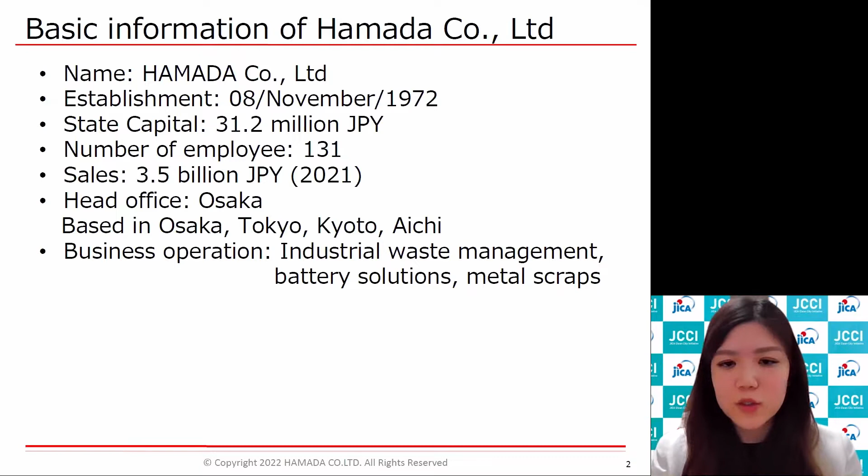I would also like to talk about our main lines of business. We have mainly three businesses: metal scraps, demolition service, and waste management and energy solutions. In industrial waste management, in addition to plastic and metal scraps, we handle photovoltaic cell and mercury-related industrial wastes, which are said to be difficult to treat. For energy solutions, we handle reuse of lead batteries.

So our main line of business, as I mentioned, is taking care of industrial waste. And so we also focus on reuse and recycling services of discarded photovoltaic panels. We're one of the first companies in Japan to be working on this business, and inside of Japan, photovoltaic panel treatment has become a big issue.

In Japan, solar panels became very popular from around 2010, and a lot of solar panels were installed. The life limit of these solar panels is said to be around 20 to 30 years, which means lots of panels will be discarded around 2030.

However, reality is that the discarded panels already exceed the estimate, and that is because there have been typhoons and earthquakes and other disasters that have led to replacement of solar panels. Already many panels have been discarded, and so treating these solar panels has become a big challenge for Japan. That is why Japan is working urgently to recycle these solar panels.

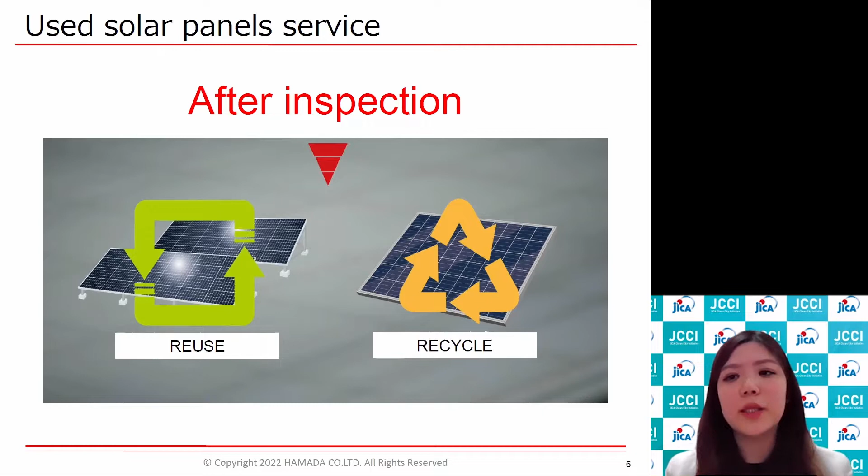First, we do an appearance check of the discarded solar panel, and we identify which panels can be reused and which ones cannot. For the panels that can be reused, we sell the panels to domestic and overseas clients. In the past, we have sold over 150,000 panels.

For the panels that are not fit for reuse, we will be recycling them so that they do not need to go to landfill. And this is our recycling scheme for the solar panels.

First, we dismantle the aluminum frame, and we use our equipment, called AFLD1, in order to dismantle the aluminum frame. We remove the frame without crushing the glass. If the glass gets crushed, it really becomes difficult to recycle the glass as raw material, and so dismantling the aluminum frame without destroying the glass is a key factor.

After the frame has been dismantled, the glass and cell sheet will come out and they are attached together. We use a hot knife technology, which heats to 300 degrees Celsius, to separate the glass and the cell sheet, and there will be no impurities on the glass or cell sheet after the separation.

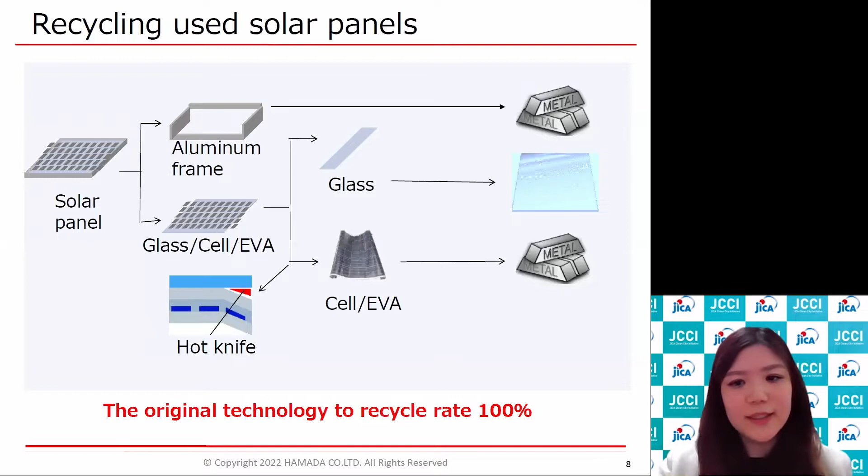Up until now, I have talked about Hamada's technology in Japan. Hamada also focuses on our overseas business. We have been selected to do a project survey for JICA. And even though it is not a solar panel project, we are currently doing a survey on the reuse and recycling of lead batteries in Côte d'Ivoire.

We are also certified by JICA as an SDGs partner, as a company working on SDG issues. Going forward, the reuse battery survey that we are doing for JICA and the solar panel work we are doing, we hope to combine these two in order to provide electricity to areas that currently do not have electricity. We strive to really contribute to a sustainable society that can help preserve people's health and their living environment in developing countries.

If you have any questions about the content I've presented today, please come to our booth or contact us to discuss more details. I look forward to talking with you. Thank you for your kind attention.

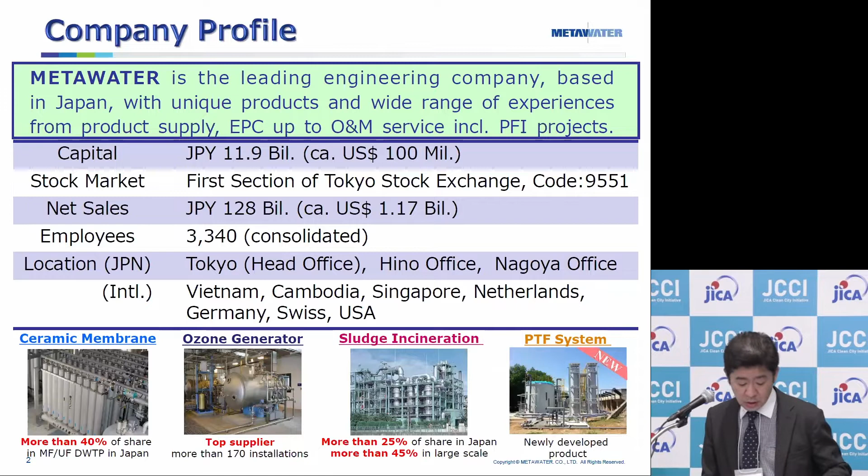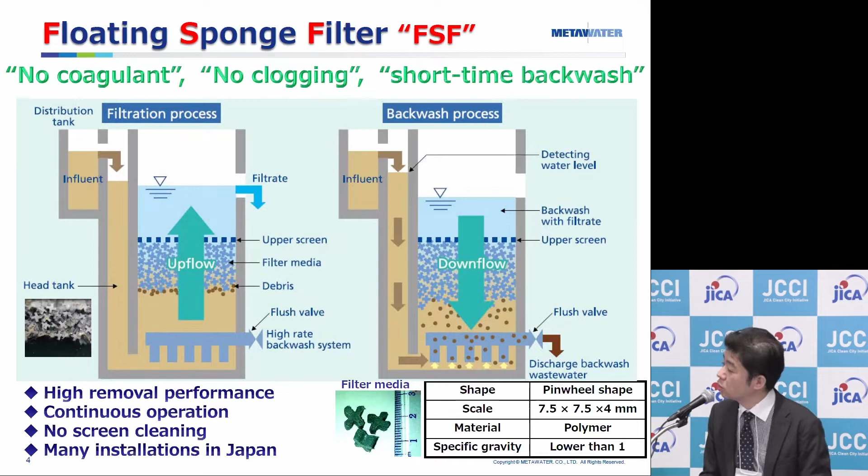Then at some point, in order to clean those substances which are caught, they are cleansed or washed out. That is the feature of this technology, or this process.

Next is the second process, in the middle, HTF. This process is an updated or renewed version of technologies existing in the United States or Europe. Conventional trickling filters have some problems, like clogging of water spray nozzles, odors from sludge, and having insects such as flies. Therefore, we have renewed this system, replacing those existing conventional systems, using some filter media to resolve this issue.

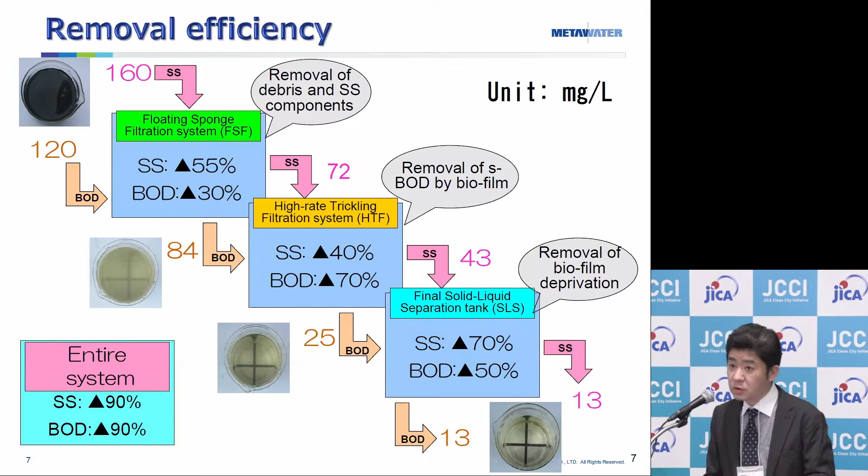So I have explained the benefits of PTF, and let us compare that system or technology with other existing treatment technologies or processes. What I would like to point out here is the power consumption. Power consumption is much lower with the PTF process.

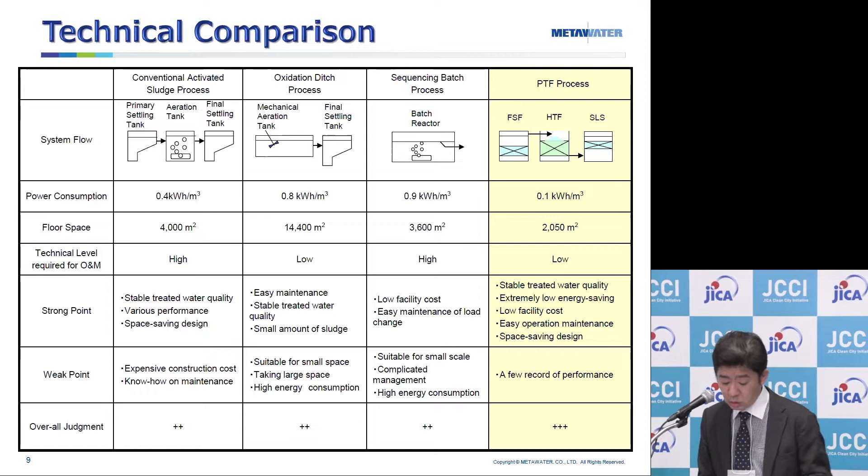And if you look at the floor space, the floor space for the PTF process is 2,050 square meters, which is smaller than the other process. So for those countries in which the available area or space is limited, this PTF process is attractive.

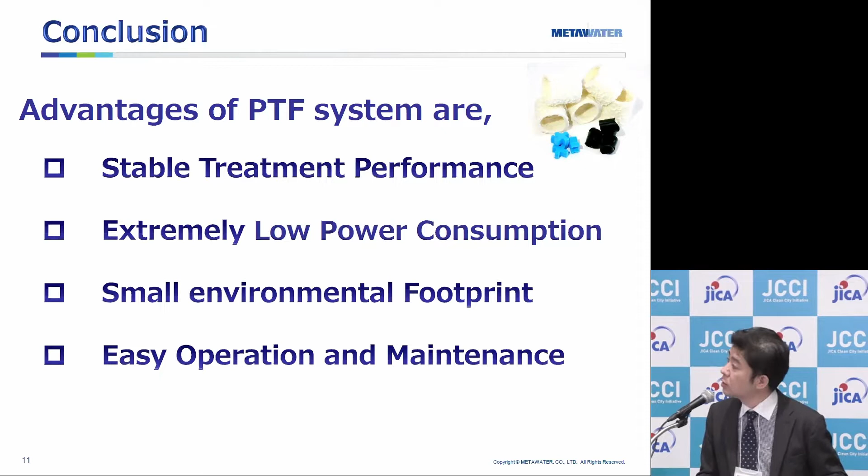And lastly, I have summarized the merits or benefits of the PTF. There are four: firstly, stable treatment performance; secondly, extremely low power consumption; thirdly, small environmental footprint; and fourthly, easy operation and maintenance. These four merits can be provided through our service.

And to conclude my presentation, I would like to thank you all for the invitation and giving the opportunity.

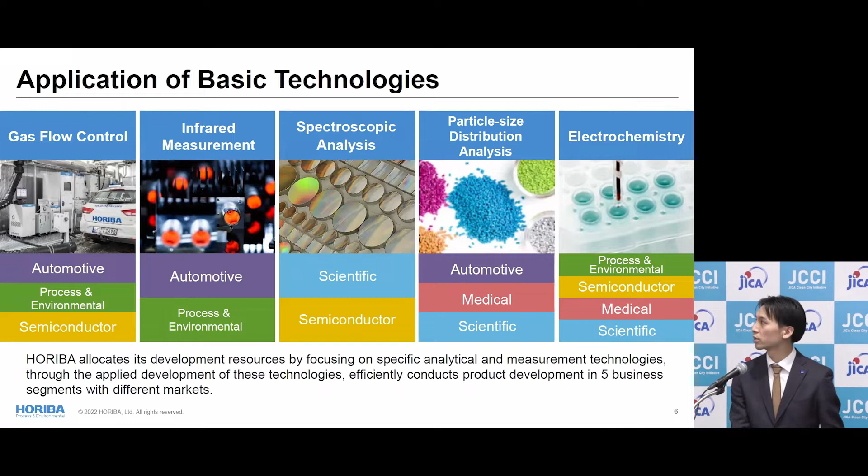In typical cases, on the right side you can see the yellow dots and also the blue dots. This shows the simplified monitoring systems, which are quite affordable and simple. By using these simple systems, you can increase the density or concentration of monitoring points. But what's important is to have AQMS, because the data from a simplified system has to be calibrated to ensure reliable data. So we add AQMS to those simplified systems to increase the reliability of the overall system.

Next, I would like to explain about the stack gas system in the power plant, and also steam boilers, glass furnace, and petroleum refinery, and also the waste incineration system. Our system is applied to make sure that no hazardous material or gas is emitted.

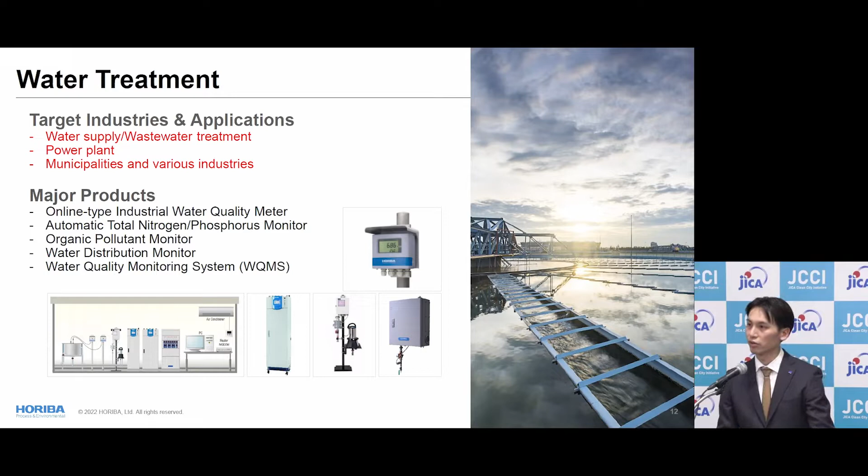This is about water treatment and monitoring of water quality. We have the monitoring system for water supply, water treatment, power plant, and municipalities. By integrating all the know-how of offline and online systems, we try to reduce the burden on the environment and respond to very high level and sophisticated needs. This is a water quality monitoring system, WQMS as we call it, and we have this applied across the world. In addition to the online monitoring system, we have offline instrumentation as well, so we can make a proposal of business on those products too.

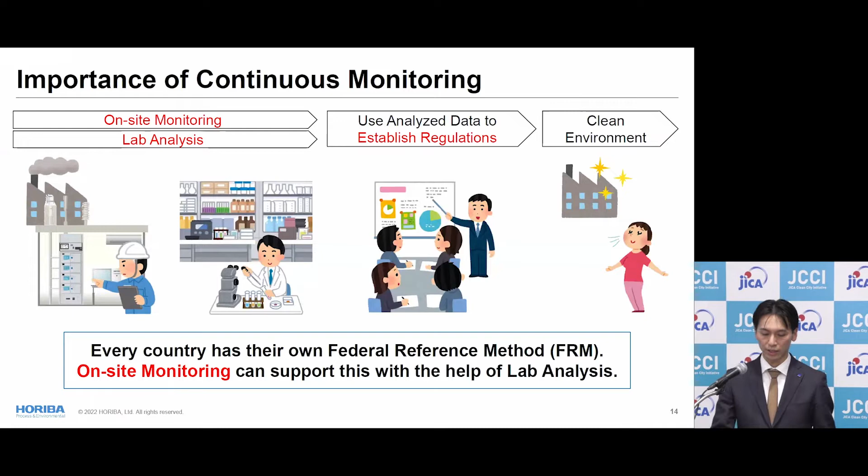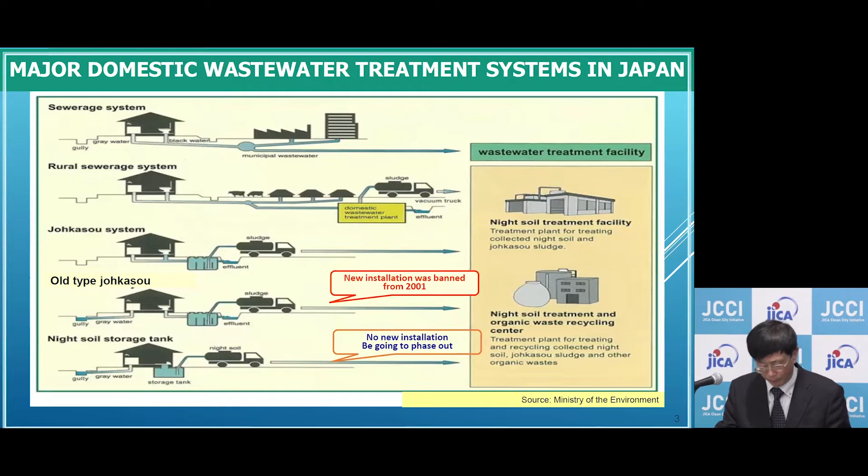johkasou is a facility to treat all wastewater generated from houses and is mainly installed and used in individual houses in Japan. In johkasou, the activities of microorganisms are utilized to decompose organic matter in wastewater. The treated water is disinfected with chlorine disinfectant and then discharged to rivers and other water bodies.

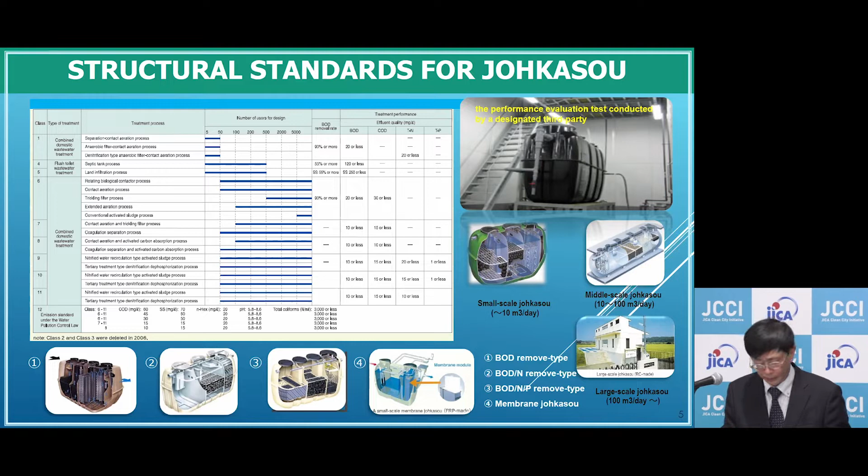In order to guarantee the treatment performance, johkasou must comply with the treatment method and structure specified by the government, or must pass the performance evaluation test conducted by a third-party organization designated by the government. johkasou can only be manufactured and go to market after being certified by the government. johkasou can be installed in individual houses and commercial facilities for wastewater treatment. It can be classified into BOD removal type, nitrogen phosphorus removal type, and BOD advanced treatment type based on their treatment performance.

In order to ensure johkasou have the good treatment performance as designed, johkasou should be properly installed, maintained, desludged, and inspected. With the johkasou Act enacted in 1983, a legal framework was established. Based on the law, technical standards for johkasou construction, operation and maintenance, desludging, and legal inspection, as well as a training system for johkasou technicians, were established.

During a normal maintenance inspection, works such as measurement of the effluent quality, replacement of disinfectant, checking of attached equipment such as a blower, and verification of sludge accumulation are performed. During desludging operation, the accumulated sludge in the tanks is dislodged and transported to a sludge treatment facility for further treatment. During the legal inspection, it is checked whether the installation, maintenance, and desludging have been properly performed and whether the treated effluent has reached the predetermined water quality.

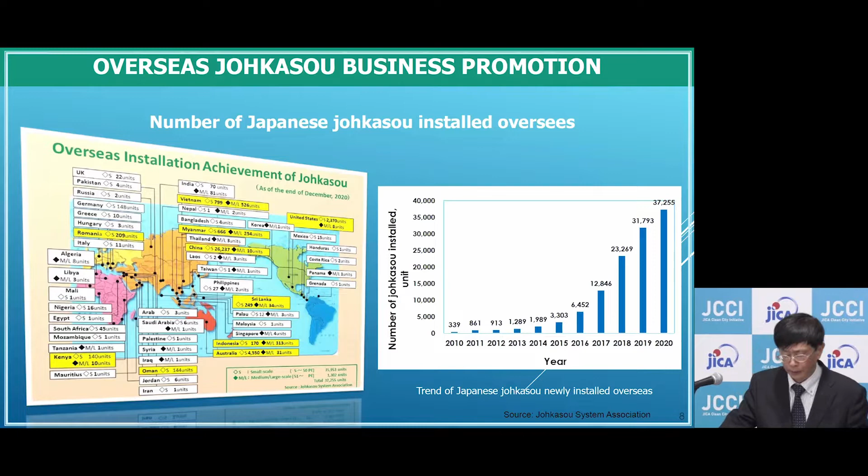The number of Japanese johkasou installed overseas is increasing year by year, and as of the end of 2020, about 37,000 johkasou have been installed in more than 49 countries around the world, and about 90% of them are installed in Asia.

With the increasing demand for johkasou in Asian countries, johkasou manufacturers are expanding their overseas business, and local production of johkasou is progressing. In particular, johkasou business is active in China, Southeast Asia, and South Asia.

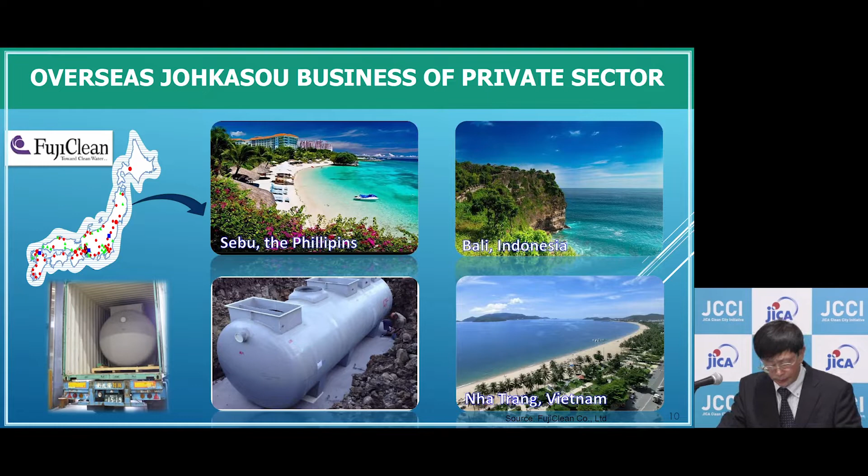Fuji Clean Industry, the biggest company in the johkasou industry in Japan, is developing johkasou business mainly in tourist resorts in Asia.

JECES is the first johkasou manufacturer to establish a johkasou production base overseas and is actively promoting johkasou business from Southeast Asia to South Asia and Africa.

Kubota, a famous johkasou manufacturer in Japan, develops johkasou business mainly in China, Vietnam, and Myanmar. Kubota have exported and sold more than 30,000 johkasou overseas.

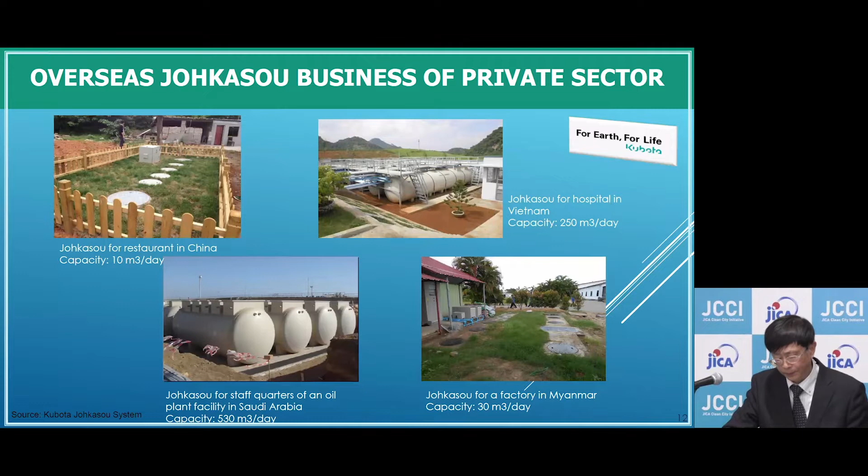Japan's johkasou system has become well-known in the world. We believe that johkasou will continue to contribute to solving sanitation and environment problems around the world, especially in developing countries. Thank you for your attention.

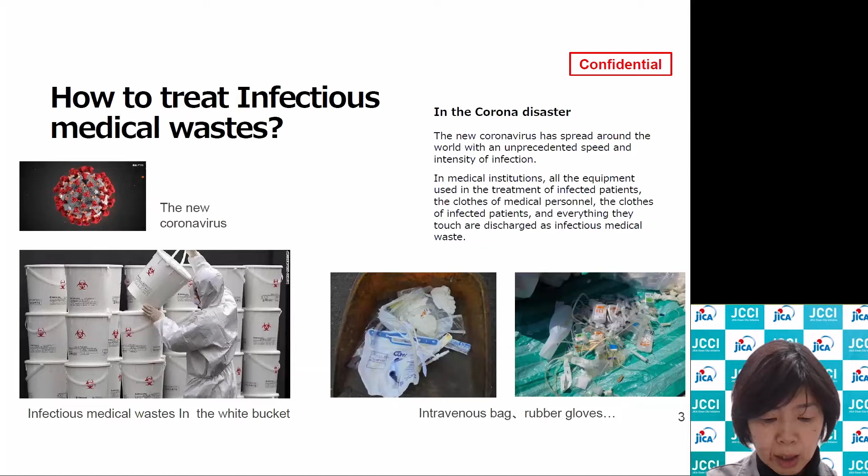So all of the equipment and the tools, medical tools used for treating this disease, are generated as infectious medical waste from the plastic containers, rubber gloves, or tubes. These are put in the white box in the picture and covered. Once it's covered, we are not able to open it again.

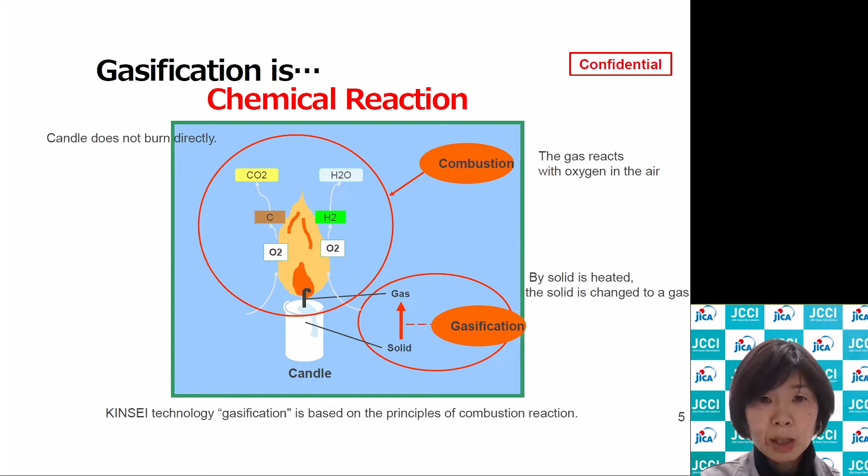And then carbon and hydrogen around the flame will combine in the ambient air, generating H2O or CO2. So this is about combustion. The case is that dry distillation technology follows this same philosophy or principle.

So once gasification has started and stabilized, a combustion agent is not needed. That is the feature of our technology, which allows for safe treatment, operations and maintenance, and cost effectiveness.

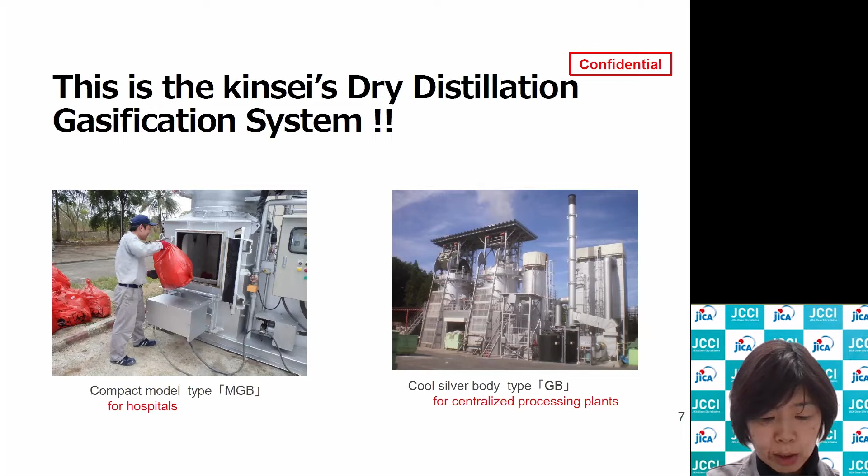In terms of all of this, ours is the best. This is Kinsei's dry distillation gasification system. From the left-hand side, one is a compact model, which was demonstrated in Phuket for JICA's project. The right-hand side, the larger one, is Type GB, our main product. This equipment is used by the waste management company.

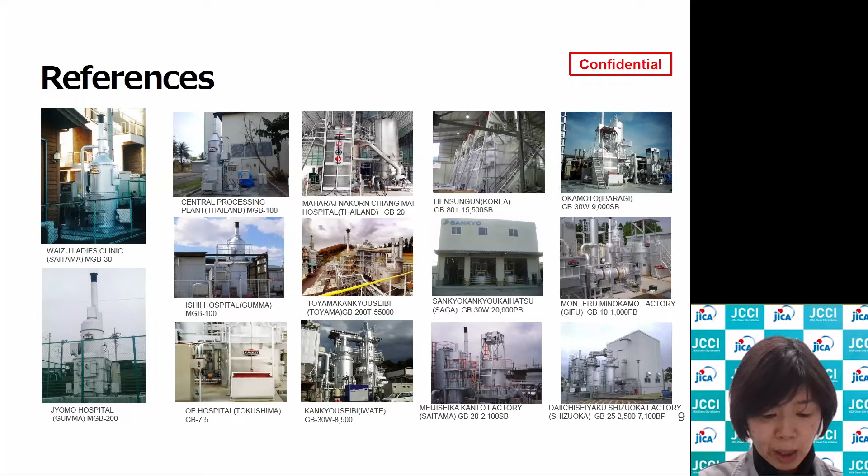Our equipment can achieve stable combustion, meaning thermal collection can be stably done.

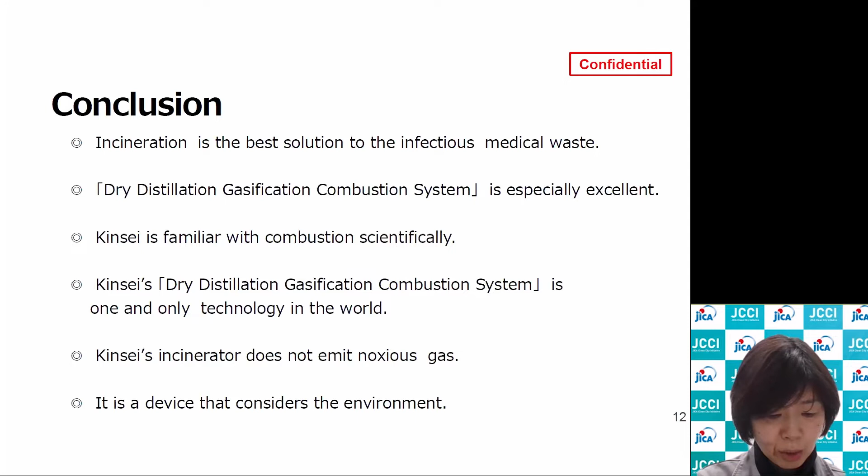So the conclusion: incineration is the best solution for infectious medical waste, and the dry distillation gasification combustion system is especially excellent. Kinsei knows combustion scientifically very well, and Kinsei's dry distillation gasification combustion system is one and only technology in the world. Kinsei's incinerator is contributing to environmental preservation.

Thank you for your attention. To meet your needs, we are able to provide our solutions. Your opinions, comments, and questions are always welcome. Thank you.

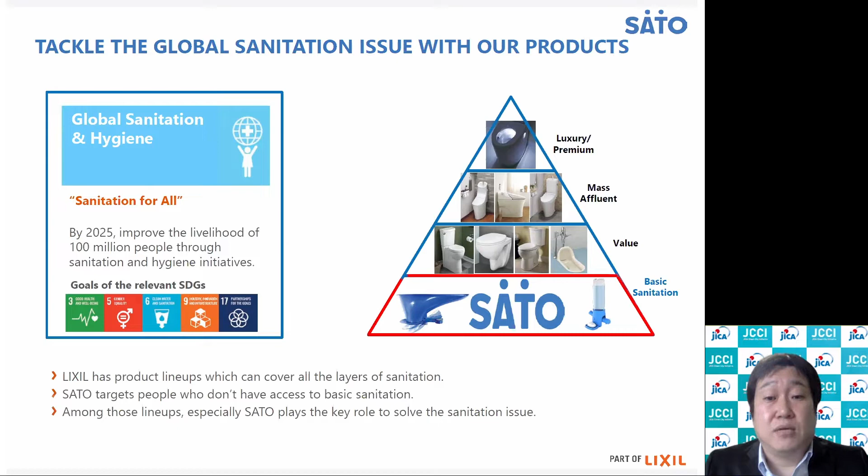You can see the pyramid here. At Lixil, we have several brands: the luxury premium segment at the top of the pyramid, down to mass production, or the area called value. So we have a wide range of products. And we are now proceeding toward what is called the bottom of the pyramid, to provide basic sanitation systems for people in need. Next, please.

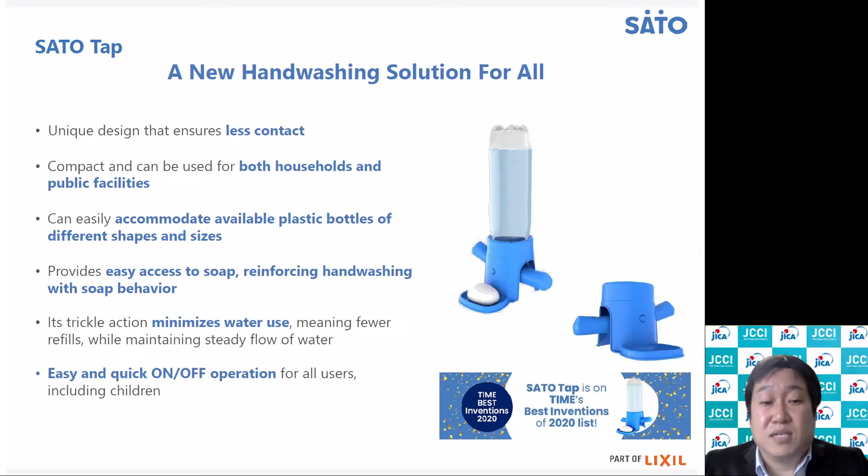Under COVID, it was difficult for any company to launch new products, but we developed this product. In 2020, Time magazine of the US gave us an award for the Sato tap as one of the most excellent products under COVID.

Because we are manufacturers, we have technology for manufacturing goods. The first thing we do is identify the needs and challenges of each country to determine what products should be delivered there. Along with the local people, we identify issues and try to solve problems together.

What's more important is local production and local consumption. Without that scheme, if we try to do the same as we do in Japan, it will not be possible to do the same locally. So we partner with local companies so that products can be produced locally and consumed locally, creating a cycle of make, sell, use locally - that's the key.

By running this cycle continuously and sustainably, the products can be produced and used. We are working to establish such a system.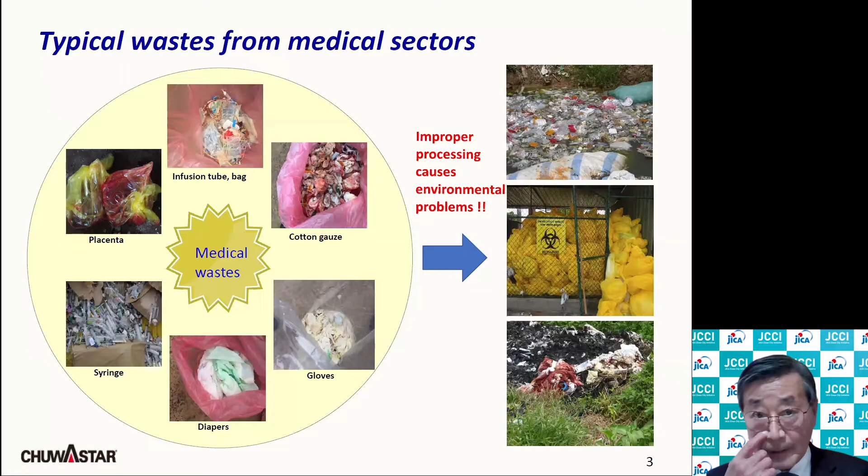We believe we need appropriate practices to handle medical waste. So what is the best way to manage medical waste? The answer is incineration. Incineration is the best way to manage medical waste for three reasons.

First, we can achieve complete sterilization through incineration. Second, the processing time is short - in a second, the waste will turn to ash. Third, incineration can really reduce the huge volume of waste; the volume will become 3% of the original in terms of weight. These are the three advantages of incineration, so we believe incineration is the best way to manage medical waste.

We have 2 major characteristics of the Chuwastar product incinerator. Number 1, it's a water-cooled structure. Number 2, we have tiny holes in the incinerator which force the air supply into the incinerator.

Because this is a water-cooled system, we have excellent durability. And it's highly safe. People do not need to worry about getting burned through the high temperature, because the heat is taken care of with the water cooling.

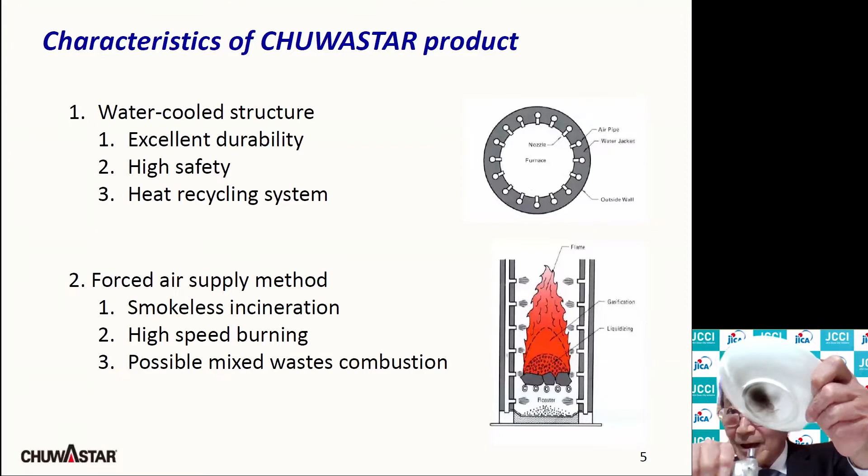In this way, even if you apply this plate to the flame, you can see there's no black soot coming out. That's what we have done with the Chuwastar incinerator. We use water cooling and the bamboo blowpipe method for the combustion.

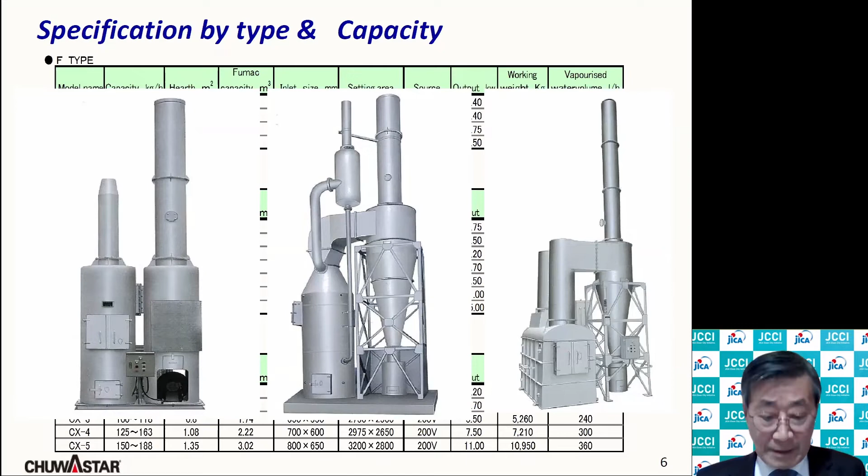Chuwastar has a vertical type and a horizontal type. We have type F with 4 models, AP type with 7 models, and CX type with 5 models. The capacity ranges somewhere between 10 kilograms to 300 kilograms.

Our incinerators with a capacity of more than 300 kilograms per hour are impossible to operate smoothly just by manpower. So the structure is all automated, from input to taking out the ash.

The left-hand side picture is our CX300 model, which is capable of processing 300 kilograms per hour. The right-hand side is our CX800 model, which can handle 800 kilograms per hour.

For any incinerator of 300 kilograms or more, we can design a custom capacity, and we can operate 24 hours and process over 20 tons per day.

We export to 35 countries across the world. In Southeast Asia, we export to almost all the countries. In Vietnam, we supply to 360 hospitals. These hospitals use Chuwastar. We are currently focusing our efforts in Africa.

With support from JICA, we have supplied to Morocco. With help from UNIDO, we have exported to Senegal, Madagascar, and also Congo. So we have supplied products to 4 countries in Africa.

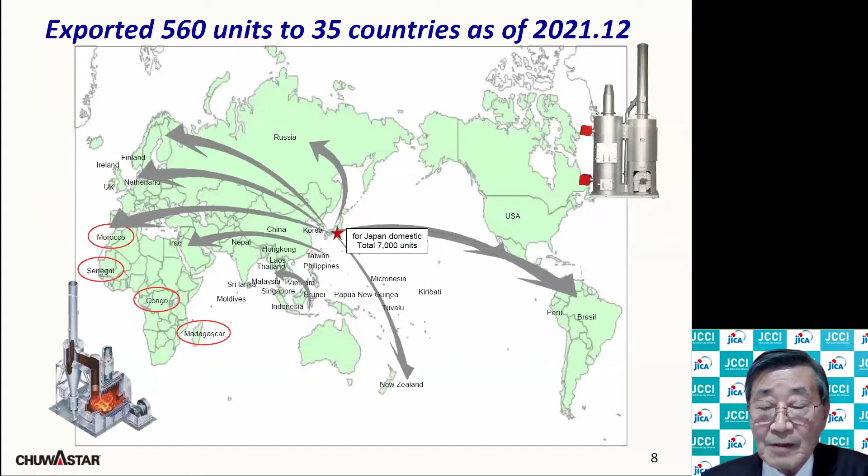On the 11th of this month, we have supplied to Bangladesh, which brings the number of countries we supply our units to, to 36 countries.

Chuwastar's goals are to focus on the Sustainable Development Goals number 3, 11, and 12. We are focusing our efforts on helping achieve these goals.

As our corporate philosophy, we hope to use Chuwastar so that throughout the world, we will be able to achieve a sustainable and better environment. That is the vision we work towards in our day-to-day activities.

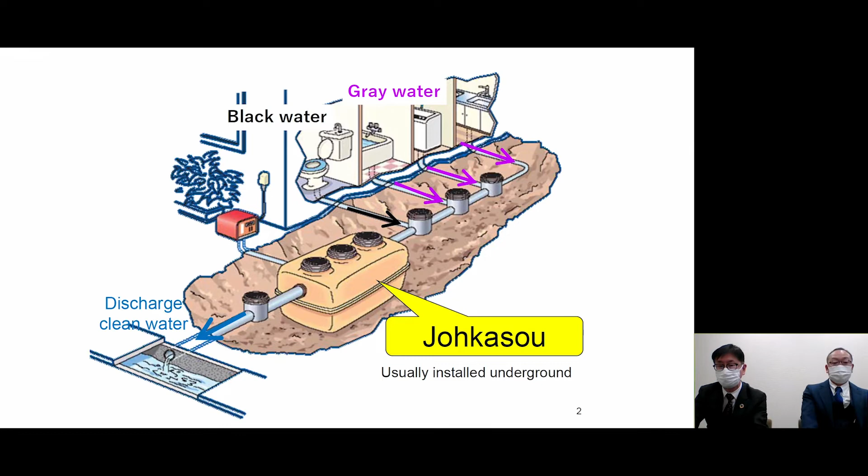Septic tanks, which treat sewage mainly with anaerobic treatment, do not need electricity, but Johkasou uses a blower for aerobic treatment with electricity. Recent blowers need less energy. For example, electricity consumption of the blower for a small Johkasou unit with airflow of 60 liters per minute is about 40 watts.

JICA's verification survey with the private sector for disseminating Japanese technologies for improvement of domestic wastewater treatment through introducing Johkasou in Vietnam aims at disseminating Johkasou technology with our counterpart, the Ministry of Natural Resources and Environment of Vietnam, and Hung Yen Province government. We have installed Johkasou at 3 locations in Hung Yen Province: one large unit of 200 cubic meters of treated sewage at a collective housing area, 2 medium-scale units of 25 cubic meters at a kindergarten, and 2 small-scale units of 3.5 cubic meters at single-family dwellings.

There have been 1,325 units of Johkasou installed in Vietnam. Against a backdrop of increasing environmental awareness and economic power, demand for wastewater treatment facilities with high treatment performance is increasing, and local manufacturers have started production and selling of similar products.

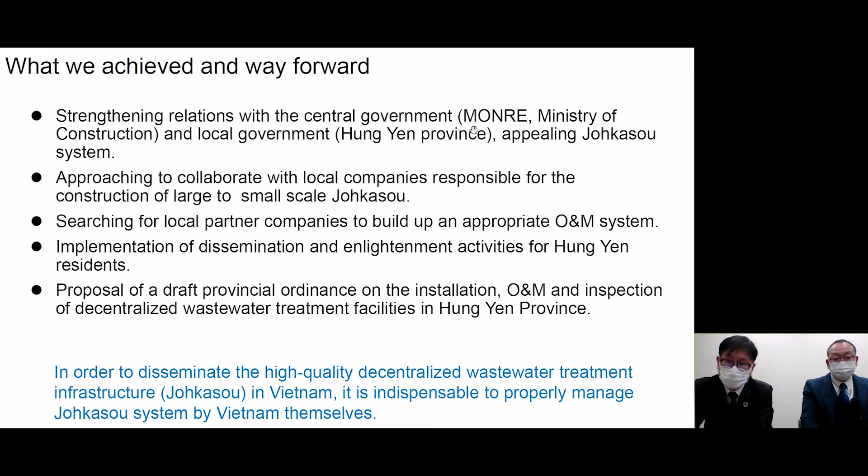With that, I would like to conclude our presentation. If you have any questions, we would like to answer them.

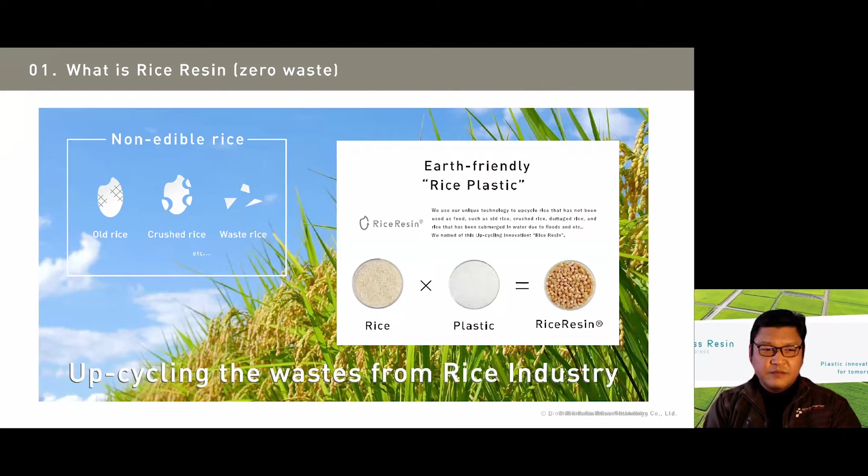Rice resin is invented and produced by Biomass Resin Holdings from Japan.

Now allow me to introduce you to the company. It took nearly 20 years to develop this innovation and technology of rice resin for our CEO, Kamiya, and other chief executives as founders. In March of 2020, we formed a holding company, and under its umbrella there are operating companies for various sections and purposes.

Our resin factory is located in Niigata Prefecture, where we produce the largest amount of rice in Japan, and we are constructing factories in Kumamoto and Fukushima next.

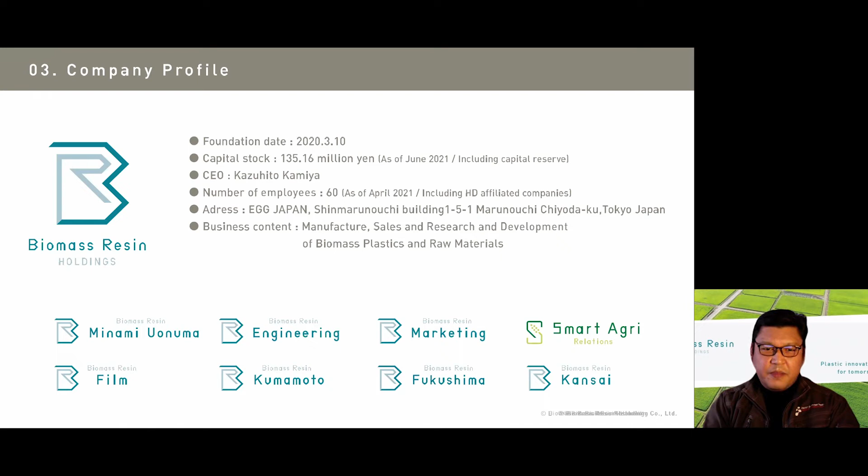Rice resin can mix up to 70% rice with conventional petroleum-based plastic, such as polypropylene and polyethylene. In other words, the content of petroleum-based plastics can be significantly reduced.

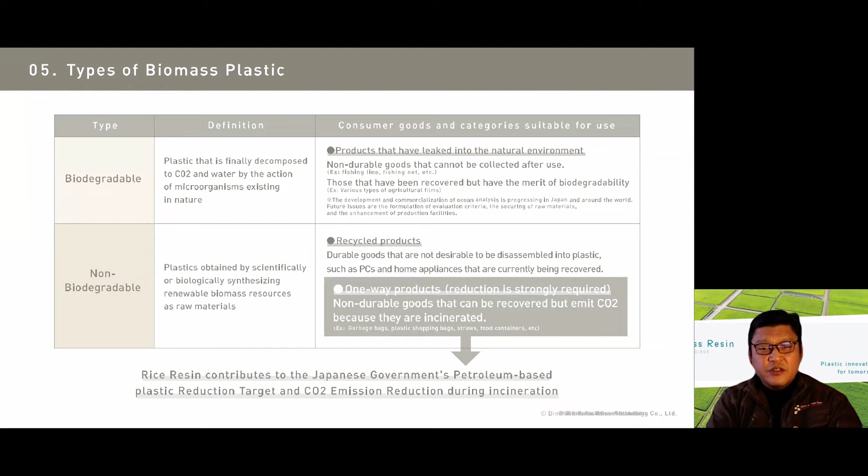There are two types of biomass plastics in the market: biodegradable and non-biodegradable. Our basic rice resin is non-biodegradable material. Therefore, it is suitable for one-way use of plastic products because CO2 can be significantly reduced when burned as garbage waste. This contributes to the Japanese government's petroleum plastic reduction target and CO2 emission reduction during incineration.

Regarding CO2 emissions from non-energy sources, rice plastic can reduce emissions during incineration compared to petroleum-based plastics. For example, in the case of a plastic bag with 25% rice content, it can be reduced by about 25% when incinerated. This is because rice absorbs CO2 during its growth, so it is carbon neutral, offsetting the CO2 generated during incineration.

Biomass Resin Holdings utilized abandoned farmlands and launched a project to produce a new potential resource, rice, which will be used as a raw material for this rice resin. Currently, we are cultivating resource rice in Niigata and Fukushima prefectures.

Last year, our group company started to grow potential resource rice in Namie, Fukushima, on a 3-hectare paddy. The town of Namie is a disaster-stricken area that was severely damaged by the 2011 great earthquake around Fukushima. We hope that our resource rice cultivation will help rebuild the region soon.

Next year, we would like to further expand and increase the scale of the paddies, and in the future we would like to utilize AI and DX to enable unmanned and automated farming for the resource rice project.

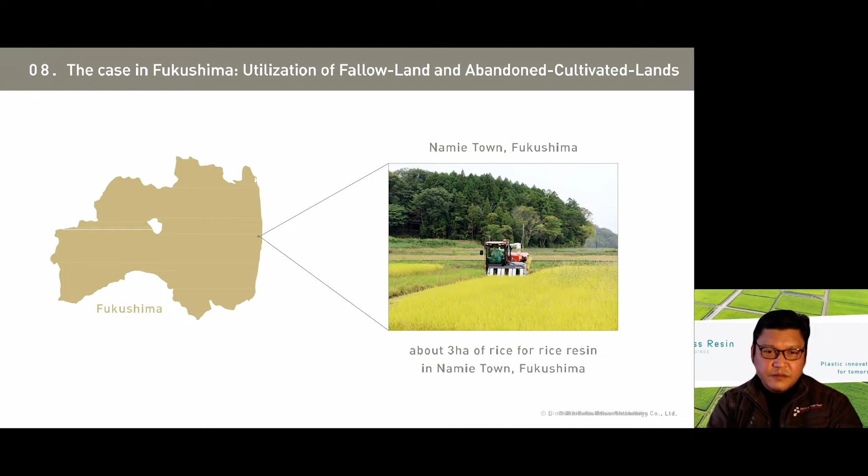Due to new trends and changes in food culture and lifestyle, recently the demand for eating rice has decreased year by year in Japan. As a result, many farmers have left rice farming. This caused about 420,000 hectares of abandoned farmland in such a small country, which is twice the size of Tokyo.

By 2025, we plan to grow resource rice on approximately 10,000 hectares of abandoned farmland in Japan. We believe this will help and support many rice farmers as well as Japan's agriculture and economy.

Our joint development with Kyoto University has recently released a new biodegradable plastic called Neoryza. This chart shows the biodegradability progress of the rice resin film Neoryza from 0 to 15 days and 30 days after burying it in the soil.

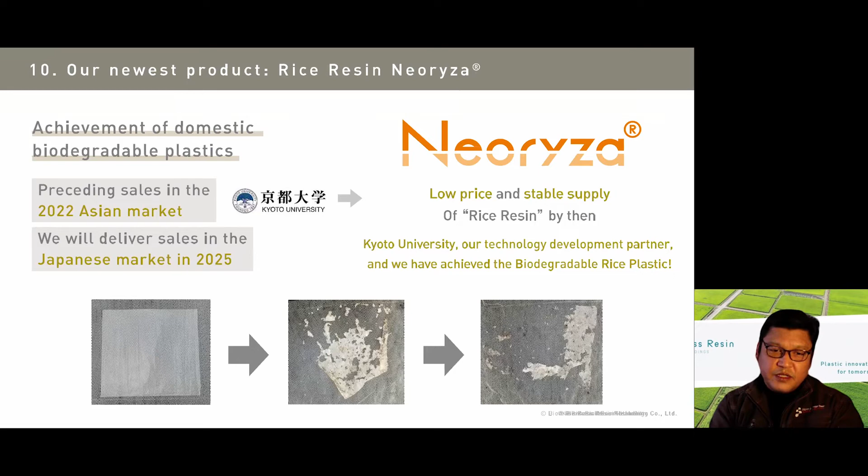Okay, now let me introduce rice resin products already on the market. Starting with building blocks with a rice content of 51%, shopping bags installed at 24,000 post offices all over Japan, municipal garbage bags for Minami Uonuma city, and rice chopsticks used at the Ministers' Agriculture Summit in Niigata.

In addition, rice plastic products for home and kitchen goods, disposable hotel amenities such as combs and toothbrushes, SDGs badges made of rice, rice straws, and stationery and lunch boxes that can be used at school.

At Japan's leading international music event, the biggest event, the Fuji Rock Festival, rice resin garbage bags were certified and distributed to all the visitors in 2021.

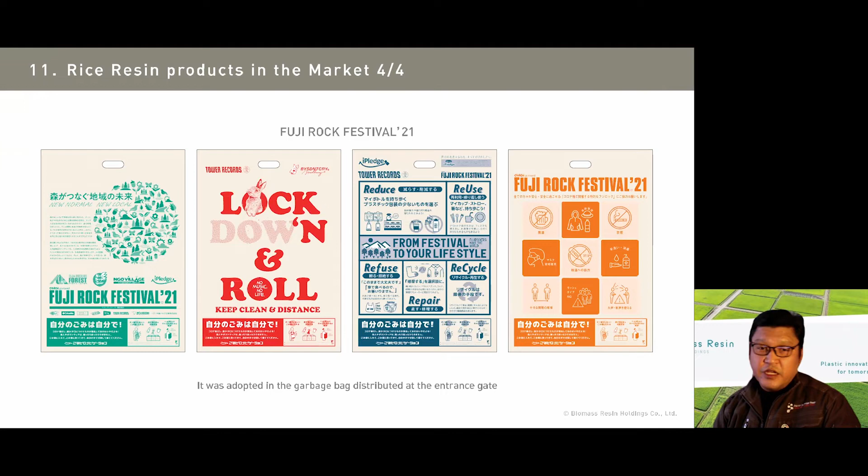Our business has received high praise from various ministries and agencies in Japan, including the Ministry of Environment, the Ministry of Economy, Trade and Industry, and the Ministry of Agriculture, Forestry and Fisheries.

With our strengths, we are planning to expand to 10 locations in Japan, such as Hokkaido, Hokuriku, Kansai, and Kochi, by 2025.

We are also aiming to start setting up factories in Asian countries such as China, Vietnam, Thailand, Singapore, and Indonesia, because they have a rice culture similar to Japan's.

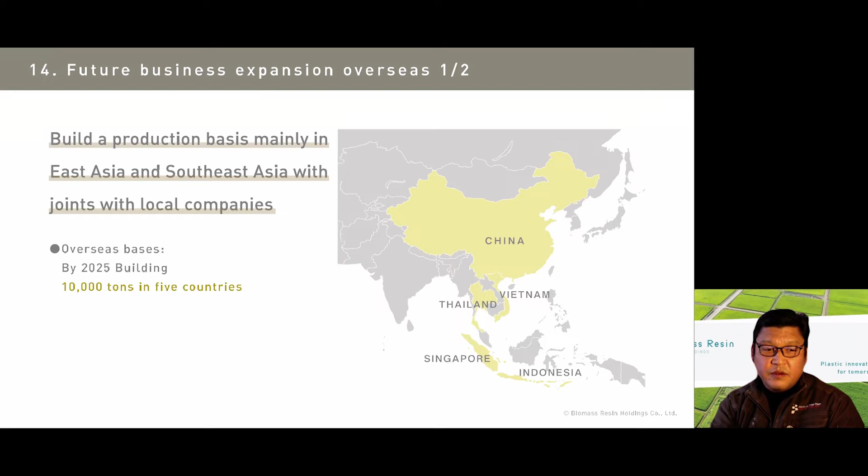Some of our overseas projects have already started. In Thailand, we are surveying the market need for biodegradable plastic to help ease marine plastic pollution. In Africa, we have a project promoting biomass plastic for packing materials and raw materials that contribute to improving environmental issues there.

Besides rice resin, Biomass Resin Holdings has the technologies and experience to produce coffee resin, wood resin, soba (buckwheat) resin, and bamboo resin as well.

Our slogan is Plastic Innovation for Tomorrow. We are looking for partners to join us on this journey to change the world with rice resin. We strive to be an environmental venture company that brings people across the world together through mutual recognition and collaboration. As I said at the beginning, I hope rice will become a potential new resource that can replace petroleum, so that humanity can wean itself off fossil fuels as soon as possible and continue to live on Earth while protecting the environment.

Thank you for watching until the end. This concludes my presentation on rice resin. If you have any questions or inquiries, please leave a message or email in the Zoom comments. Let's spread rice resin and Earth-love consciousness to everyone. Thank you, this is my whole presentation. Namaste.

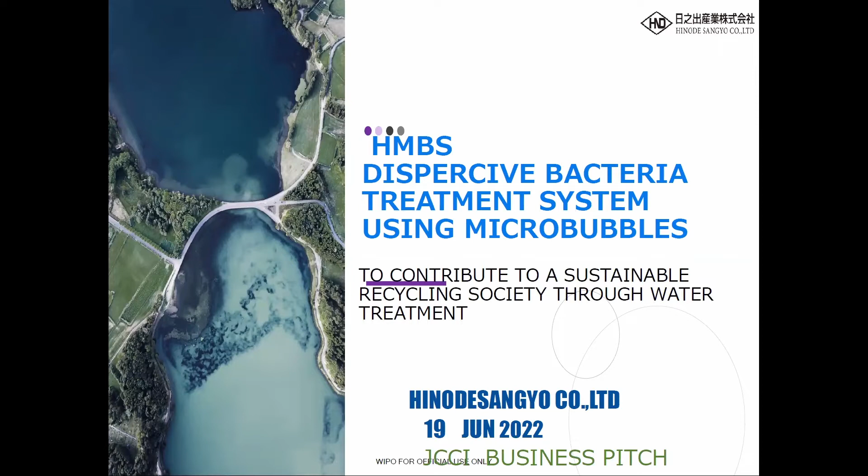We'll move on to the next presentation by Hinode Sangyo Company Limited. The presenter is Ms. Kaori Fujita. Good afternoon, I am Kaori Fujita from Hinode Sangyo Company Limited.

Today I'd like to talk about Hinode Sangyo's activities regarding the environment, the SDGs, and our HMBS, including case studies.

Hinode Sangyo is based in Yokohama City. Our company was established in 1976, and we constantly aim for new technologies to contribute to environmental conservation through water treatment. Under this corporate policy, we focus on providing clean water all over the world, and through hygienic wastewater treatment, we look to contribute to a sustainable society and further increase our corporate value.

Our business is comprised largely of four key business areas, along with international technology transfer projects and projects for the education of the next generation. Our core business is the production and sale of agents for effluent treatment.

Since our founding, we have handled effluent treatment agents, developing our own unique microorganism agents and emulsifying agents. We also have an environment-related quantification business in which we analyze water quality and microorganisms to provide evidence-based proposals to customers. We also design, construct, and maintain effluent treatment facilities, providing total solutions and comprehensive services.

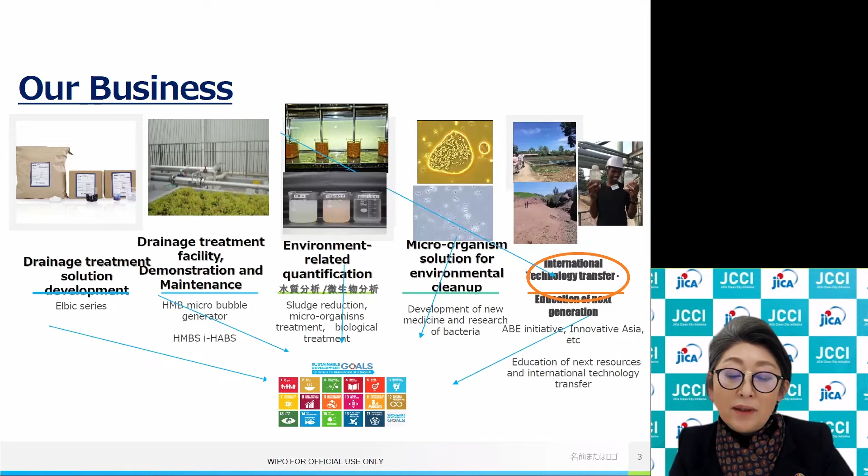Our microbial agent development and design of the dispersed bacteria treatment system, HMBS, the Hinode Micro Bubble System, have been used in JICA and UNIDO demonstration projects, as well as by many companies in Japan since 2014. Agents, bacteria, systems, and green technology, which is the theme of today's seminar, comprise the pillars of our company's strategy, and we are currently working on next-generation education projects as part of our overseas technology transfer efforts.

If you would like to know more detail about Hinode Sangyo, please visit our website. From here, I'd like to talk about HMBS, the Hinode Micro Bubble System.

This is HMB, the Hinode microbubbler. With the microbubble generator, we increase dissolved oxygen levels to make the bacteria more active, and organic matter in the wastewater is equalized through the dispersed bacteria treatment method.

We call this the HMB system, and it's a completely new method which makes wastewater treatment easier. This is the combination result, the dispersed bacteria treatment system, HMBS, which takes our core product, the highly functional microbial agent Elbic BZ, and combines it with the Hinode microbubbler, the HMB.

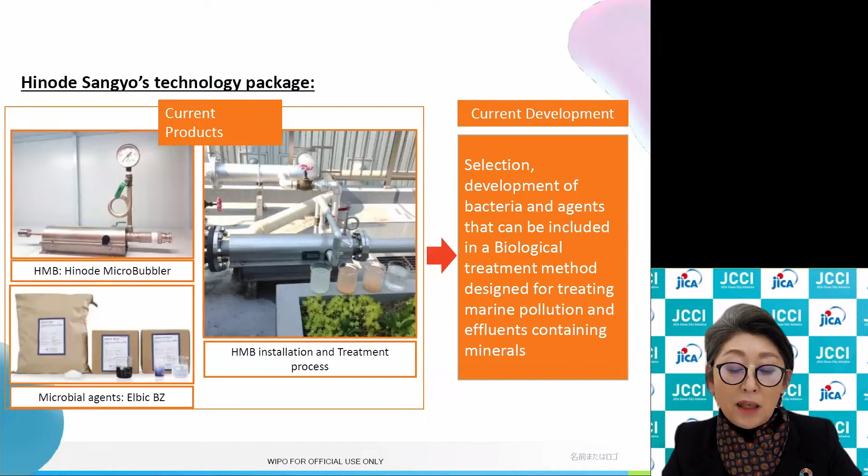The microbubble generator, the HMB's air intake functionality, helps reduce power consumption. The process is fully aerobic, which helps reduce the odors associated with effluent treatment plants.

This is a case example from a Japanese food processing factory that produces bento box lunches. The treated wastewater is 300 tons per day. Since the system was installed, it's been approximately 10 years, and we have not seen any deterioration of the treated water quality, and there have been no problems occurring.

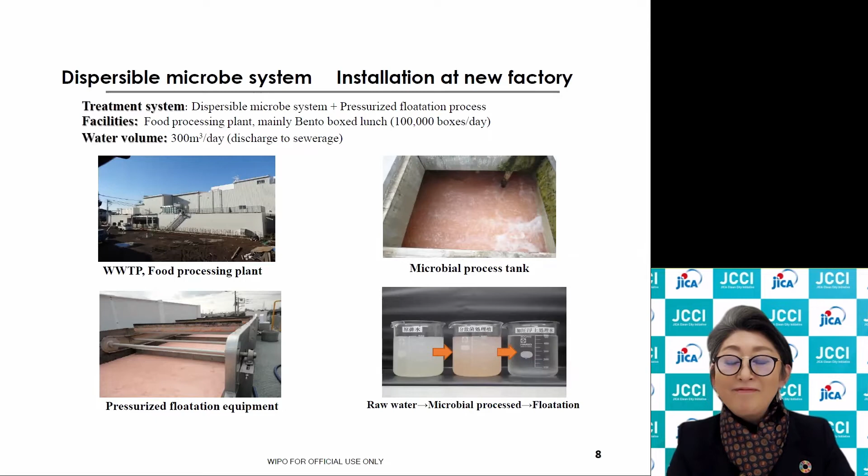On the slide here, I have the whole process from raw water to microbial processed on the lower right of the slide. From this slide, I'd like to provide some background for some of the SDGs friendly technologies that we have, as well as their potential for use.

Around the world, we're seeing increased levels of water risk and water stress. Factors contributing to the stress are depletion of water resources and increased water usage brought about by further industrialization of developing nations. We have challenges related to securing drinking water, but also agricultural water, and in wastewater treatment, we are seeing water pollution from eutrophication and chemical contamination. These challenges need to be solved.

As Hinode Sangyo thought of solutions that help the SDGs, we first looked to prioritize the social challenges, considering who or which place should be given priority, also what is needed, and what are the methods that can be passed on to future generations. Also, what is the desirable method of development and technology transfer? Also, what is the right business model? These are the things we constantly think about when we search for solutions.

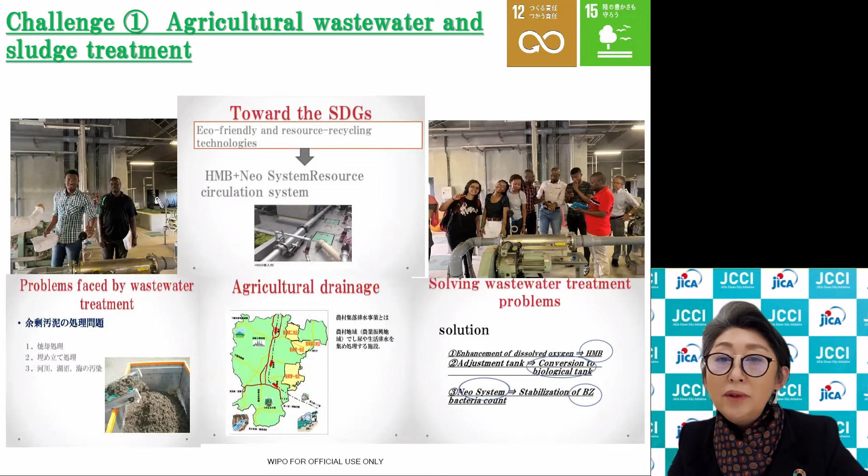Here we implemented a new system, a dissolved oxygen enhancement using our microbial agent Elbic-BZ and HMB, and a patented technology for condensed culture medium with bacteriostatic agent. This way we created the Elbic-NEO system. This is an example of how wastewater treatment can be done in a stable manner, drying the sludge so it can be used for agricultural use.

For the interns who come from agricultural countries, sludge is the most important resource that should be reused. This technology still has room for improvement, but through this initiative, we were able to make a bit of progress towards using our patented technology to contribute to Africa and Asia.

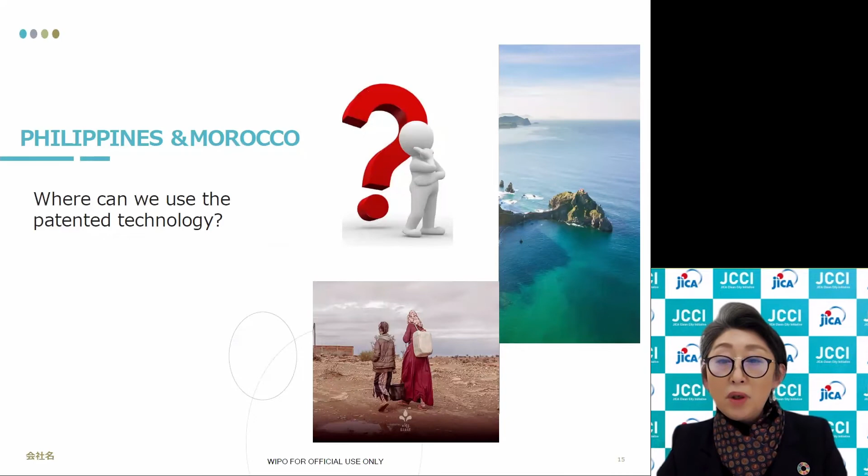But the new water regulation in the Philippines was very difficult to actually handle with the technology we had then. For BOD and COD, this project was able to achieve good results. But for phosphorus and ammonia or nitrogen reduction, we have some remaining issues. So we are currently proposing adding the A2O method as a pre-processing step for the HMBS.

There's another example I'd like to share, and this is the one we are currently doing in Morocco through the UNIDO Tokyo office scheme. As mentioned earlier, we are doing this remotely, and there's no wastewater treatment facility in this agricultural area in Morocco, and the place is very vulnerable. So the project implemented wastewater treatment facilities and created a system for using the treated water for agricultural use.

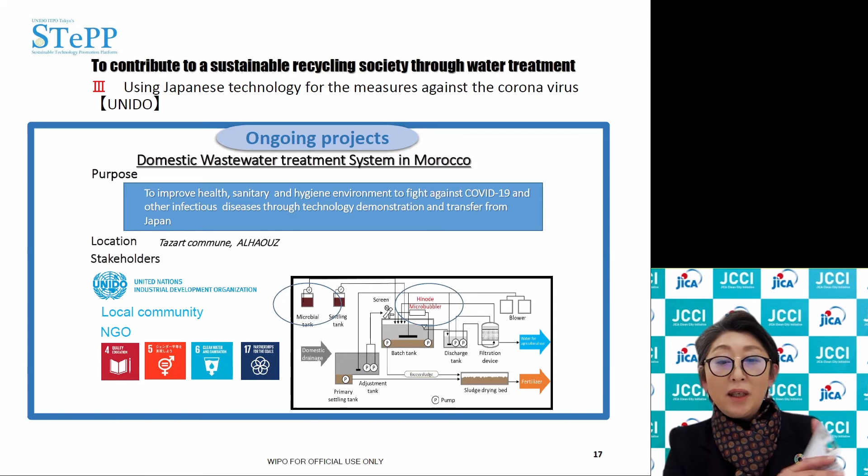In the water treatment industry, our company has worked on technology development and obtained industrial property rights. These initiatives can be seen from various different factors. As with the SDGs in this slide, we hope our technology will be used through partnerships in a diverse manner.

Lastly, I'd like to talk about our future direction. We need to confirm if our technology is really useful, if it will solve problems, if it can adapt to rapidly changing international situations and regulations, and also can it generate business.

We need to think of technical innovation and talent development in order to realize this, and a challenge in coming up with technologies and strategies that help us expand from the domestic market.

Most important is our partners in the front lines. We want to confirm and select effective bacteria that exist in various countries and constantly strive for new technology, and work together with you to realize novel water treatment technologies.

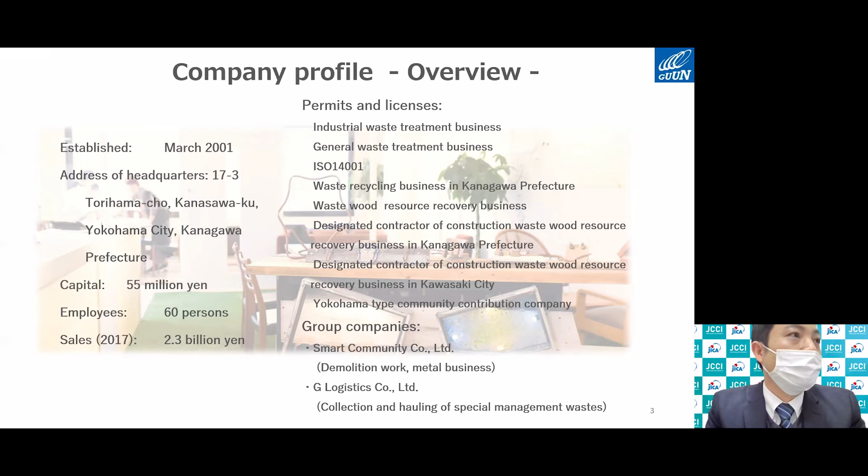So now I would like... wait a moment, please. Wait a moment, please. Yeah, okay, thank you.

So I would like to share a video about GUUN's business with the fluff fuel technology, and the use of its factory and office located in Kanagawa Prefecture, Japan. In this video, you will see a unique technology named fluff fuel that we use in Japan and the Philippines. As you may know, caloric value of fluff fuel is about the same as coal and oil, about 6,500 to 8,000 kilocalories per kilogram, but it has a lower carbon content than fossil fuels. So it can be used with about 17% less carbon dioxide emissions. By the way, this video was filmed by the UNIDO organization. So let's go ahead and watch the video.

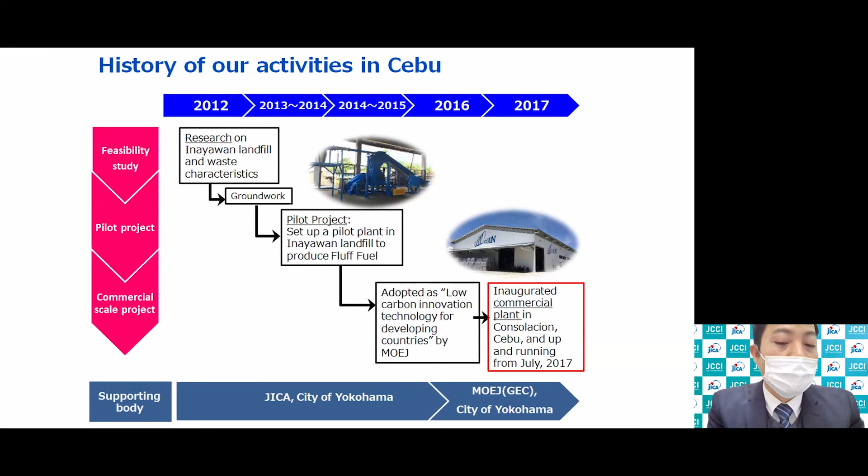So here is a brief history of our activity in the Philippines. It started with a business matching program sponsored by the City of Yokohama. We conducted a feasibility study and a verification study, which was then followed by the construction and operation of our commercial scale recycling plant in Cebu. Next, please.

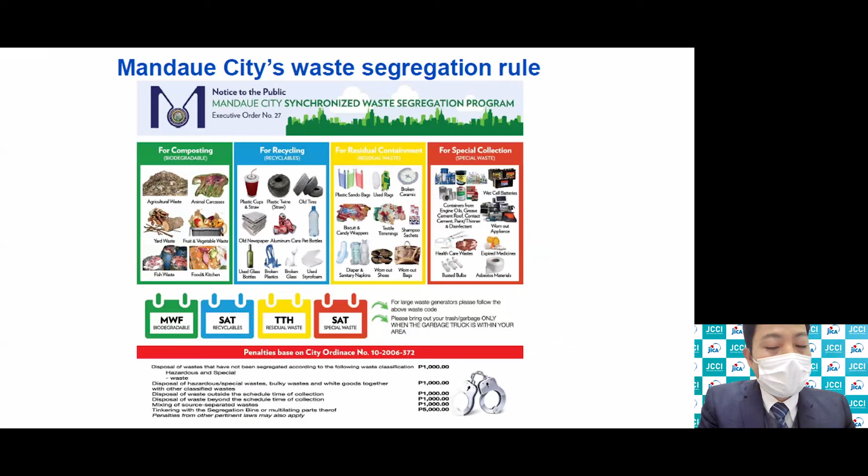In cooperation with Mandaue City, we have designed a synchronized waste segregation program. Some ideas coming from the African Clean City platform, supported by the City of Yokohama, were utilized in creating these rules. Next, please.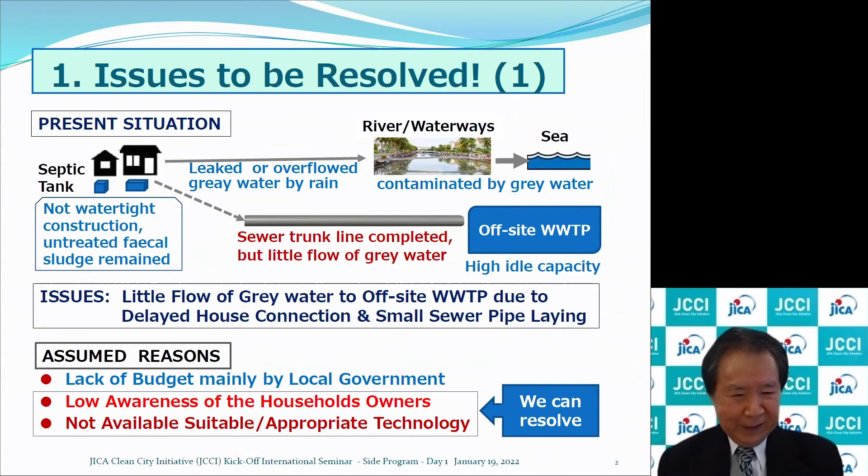Cities tend to form around favorable locations which have a lot of underground water resources, so that means you would need a major construction effort, and the process does get complicated very quickly. Please go one slide ahead. So how can we resolve these various problems?

Our micro-tunneling technology is a trenchless technology. There's no excavation except for the manhole shafts, and the micro-tunneling machine thrust jacking pipes one by one till the first piece of jacking pipes reaches the target manhole. With the drive shaft and also the arrival shaft, we will implement them and connect these shafts with micro-tunneling machines, and then we will be able to complete the construction.

We can also use MM Hole for concrete casing, and this way we will complete the installation of the pipes for that area. Rather than using an open cut method, our micro-tunneling technology has the advantage of a shorter construction schedule. Also, traffic jams and impact on people and the environment are much less compared to conventional methods. It's an environmentally friendly way.

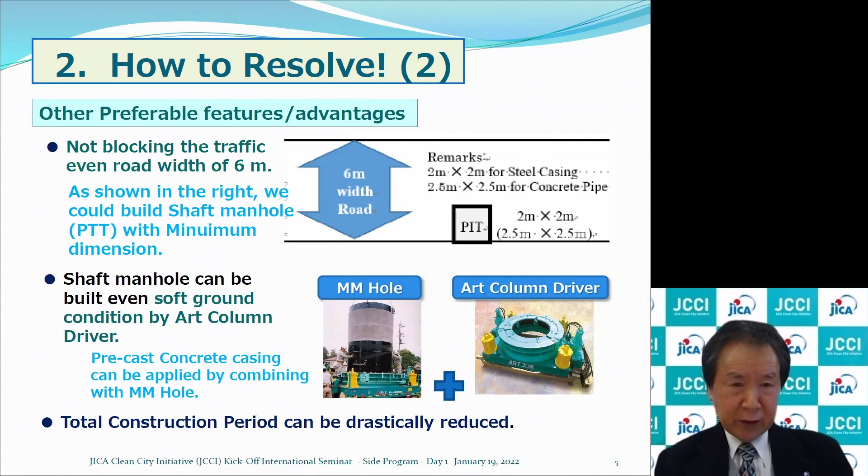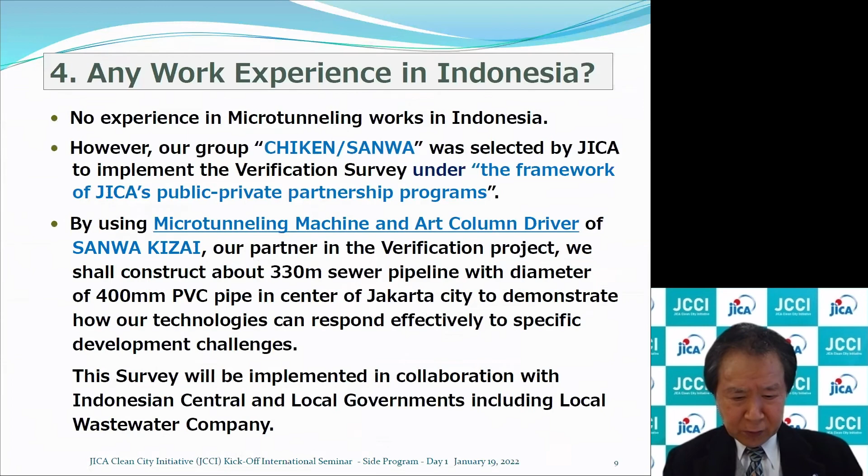We also have well points, which we use to pump out underground water through vacuum pumping. We also have chemical grouting, using boring machines to bore holes in the ground and injecting chemicals in order to set the ground. We also have a ground anchor method, driving piles into the slope to stabilize it, and we can cover the slope with mortar to enhance its strength.

Chiken Company Limited works in specialized construction, and where you have problems, we would like to help. We have various construction technologies available that we hope will prove helpful. Today, I'd like to thank you for giving me your time to present. If you have questions, please feel free to contact me by email. Thank you.

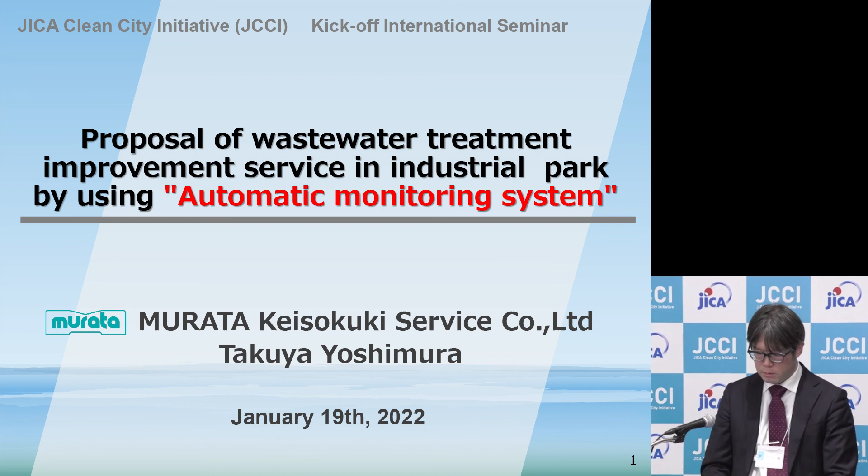I would like to make a presentation on the proposal of wastewater treatment improvement service in industrial park by using automatic monitoring system. My name is Yoshimura from Murata Keisokuki Service.

These are the contents of my presentation. First is about Murata Keisokuki Service, followed by the products and services to be introduced in this seminar, particularly the automatic monitoring system, AMS. Thirdly, Murata's efforts under city-to-city cooperation between Yokohama and Da Nang, Vietnam. Next is introduction of a JICA project using AMS, and lastly, the proposal of wastewater treatment improvement service in industrial park using AMS.

Murata Keisokuki Service was established in 1972 in Yokohama City. Main business is environmental survey and measurement services, scientific analysis, development of environment-related systems, and various consulting services. So we are working mainly in the environment area.

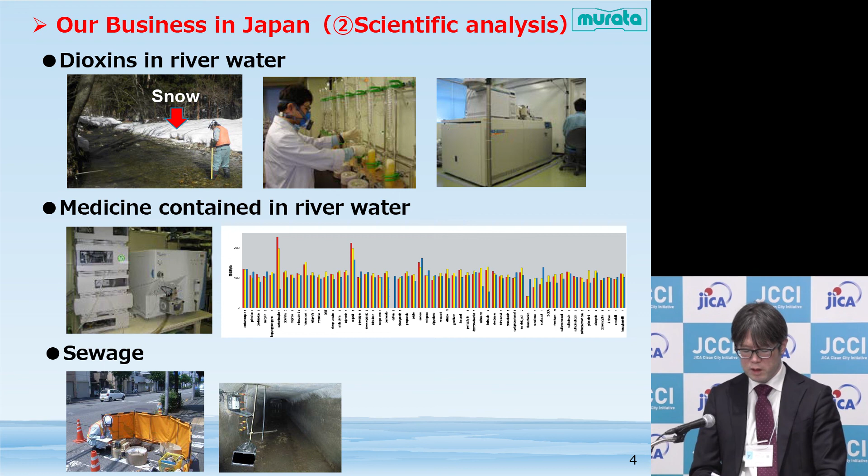Here are some of our businesses. First, for the analysis of water-related matters, dioxin in river water is analyzed, or medicine contained in river water, or the water quality in sewage can also be analyzed.

For overseas business, PM2.5 samplers are used in JICA technical cooperation projects overseas. We use our device, which is sold overseas, and the projects done in Iran, Mongolia, and Mexico are done by other companies. However, we are participating in terms of the technological cooperation.

So in this seminar, I would like to mainly introduce our automatic monitoring system. AMS can be used for real-time monitoring.

For example, for water and environment monitoring, we collect information through this AMS, which is communicated through the internet. For example, the water quality or abnormality in the data can be found on a real-time basis. By analyzing data, it can be used for preventive maintenance by analyzing the data beforehand.

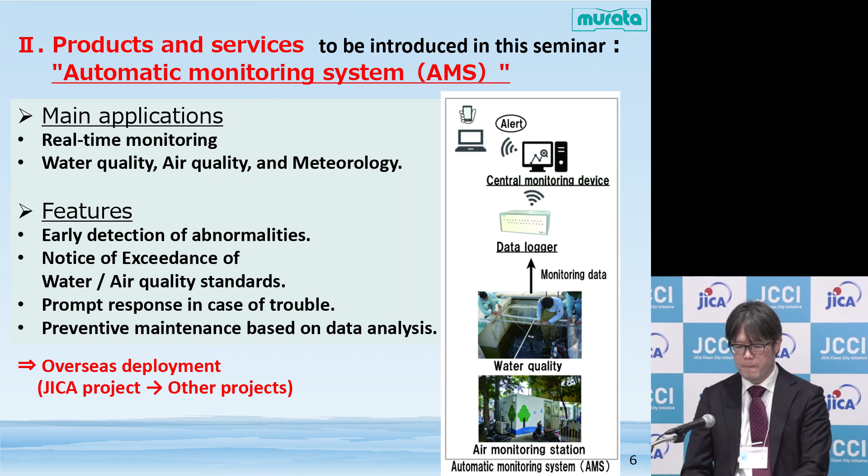This AMS was used in the JICA's project in Vietnam, and we would like to expand it into other projects or other locations.

Next is about Murata's effort under city-to-city cooperation between Yokohama and Da Nang, Vietnam. There are some overlaps in the contents with Yokohama City's government projects. Yokohama City concluded a memorandum of technological cooperation with Da Nang City, and they talked about the solution and planning of the master plan in order to resolve urban issues in Da Nang City.

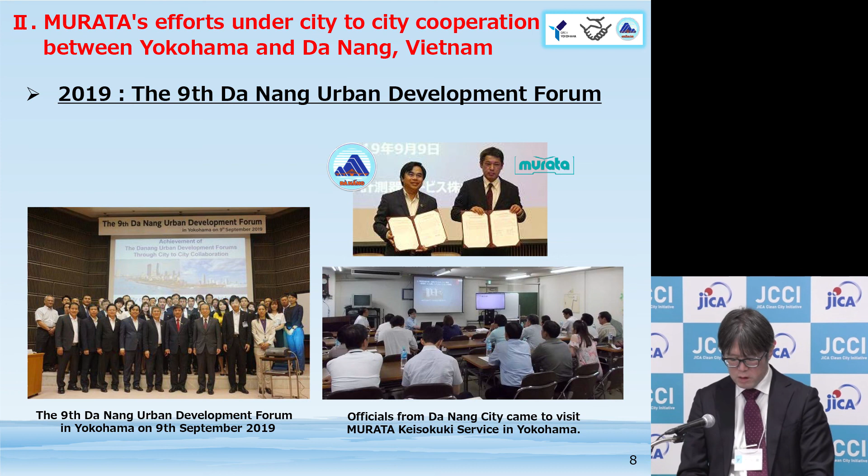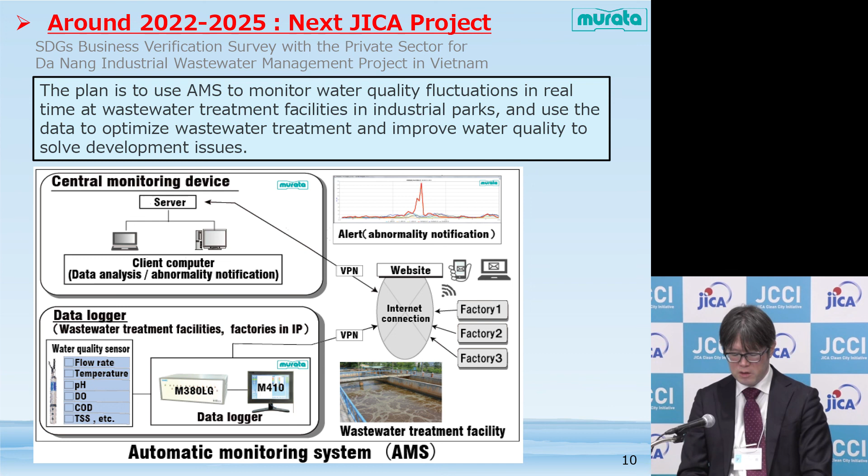For the industrial park in Da Nang City, we brought our AMS from Japan and conducted a survey for the water quality to understand the development issue. For the dissemination, demonstration, and business operation project, planned after the conclusion of the contract with JICA, AMS will be utilized for the wastewater treatment facilities at the industrial park to monitor the changing water quality on a real-time basis.

Again, our AMS can be used for wastewater treatment for industrial parks. By using AMS, we can understand the current status and use the real-time data to find countermeasures to reduce wastewater treatment cost and improve water quality.

This will be through the project for the technology dissemination, demonstration, and business operation. It will contribute as a solution for the issues facing developing countries and develop business for them. That's all for my presentation. Thank you very much.